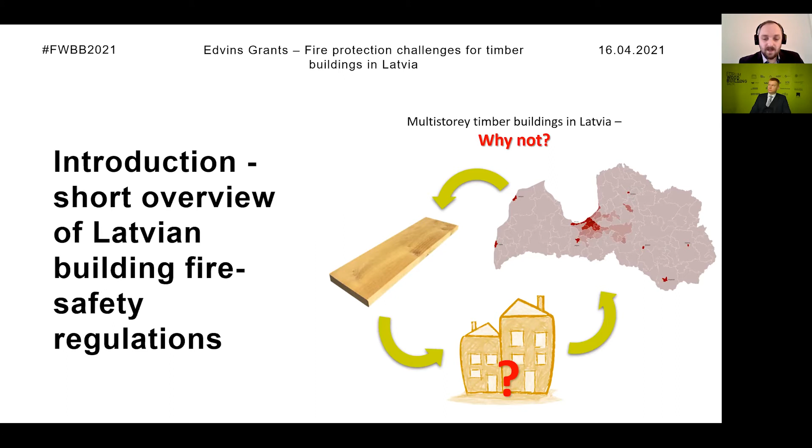First of all, I have to say for everyone who is not familiar with the Latvian fire regulation that this is a set of prescriptive rules. These are not performance-based. They are made with 2 main lines. One comes from the construction law. This is fire safety of the structures, and all the supplementary structural regulations which define the fire safety of the systems implemented inside the building, such as water supply, electricity, and so on.

And there is the second line, which comes parallel to this fire safety of structures: the fire safety regulation, which comes from the firefighting rules. This gives the regulation for the building during its time of use. And all this is supported by the Latvian standards. By Latvian standards, I mean all standards that are adopted or created and are current for the Republic of Latvia. These are Eurocodes, harmonized standards, all test methods, and so on. A lot of standards. So that is quite a difficult regulation.

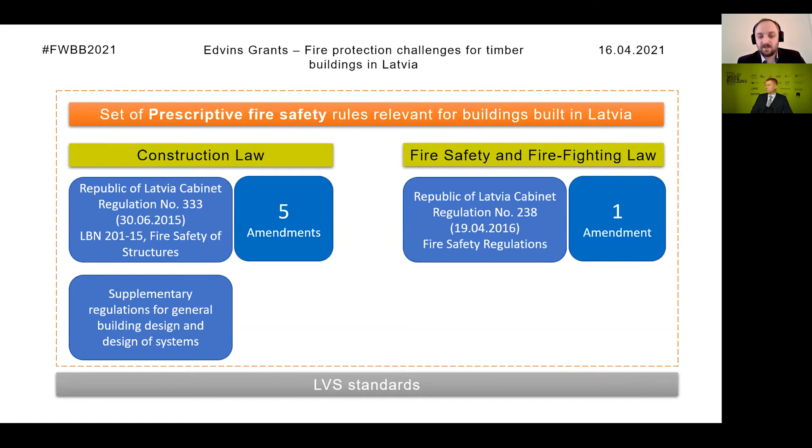In order to understand it, first of all, we have to look at how we are dividing all the buildings into use categories or use types. At the moment, we have 9 of them. This categorization is similar to what we have seen in regulations from other countries, but there are some differences. How does it work?

First of all, for all the building use types, we have 3 protection levels. The highest protection level is so-called U1, and it is subdivided into 2 groups, A and B. A is for the buildings which go high, the high-rise buildings, and class B is for wide buildings like storage areas, shopping malls, and so on. For U3, the lowest protection level category, there is no such subdivision.

Then, parallel to this protection level, we have the prescribed fire load density groups, which don't mean the same thing as the building use type, because there are building types where different buildings within the same use type have a different load density group. And there are also some algorithms to calculate the fire load density in a general way, which contradicts the Eurocode system, but that's a different story. And then we have the prescribed performance limits, which serve as a filter for all of these performance classes and protection levels.

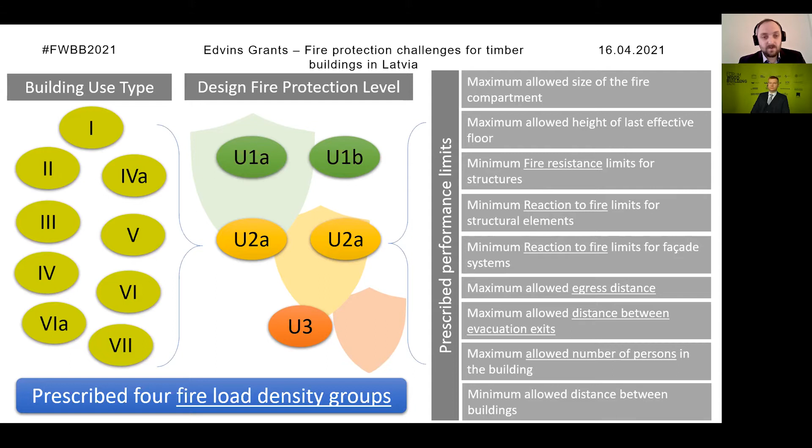To understand how it works and how it is aligning with the timber buildings, I have prepared one short example. For example, imagine if you want to create a 5-story residential building, and you have initially thought that it should be made of timber. So what do we know?

From the prescriptive rules, we have 3 levels of the fire protection design and fire protection level, and we normally would like to have the highest protection level because we want to save the people or the property inside the building. Our rule says that dwellings have fire load density which is below 300 megajoules per square meter, which contradicts with the informative Annex E from the Eurocode 1.

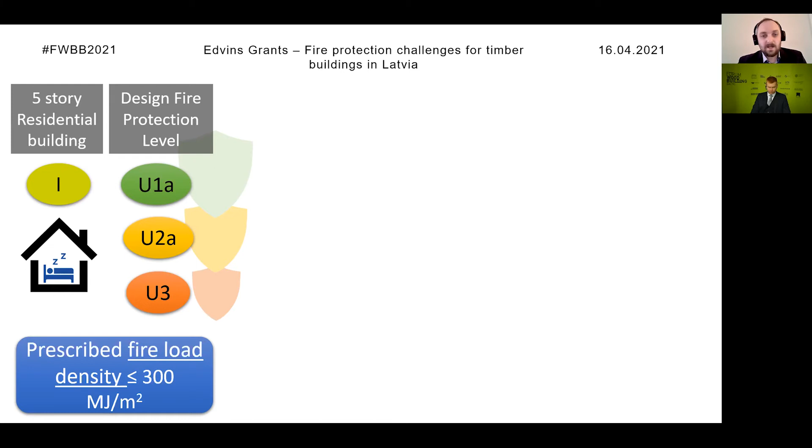This is interesting because it also contradicts with the Swedish fire load handbook and other informative materials that are around in the world. That is something that I suppose we will have to change in the future. And then we come to the performance filters.

First of all, we have defined the maximum allowed size of fire compartment. Fire compartment, the definition in Latvian regulation, differs slightly from the definition in the Eurocode, and therefore we have different attitude for this parameter.

Let's see. For example, if we want to build a highest protection level building, it will allow us the compartment size of 5,000 square meters, which is not exactly as it should be because the larger the area, the higher the risk of the fire occurrence. And this means that it is not like a restriction, but the opposite.

When we are talking about the fire resistant walls, the minimum fire resistance class allowed for the load bearing structures is 120 minutes. And then comes the tricky part. The regulation says that from the point of view of combustibility, the structural elements should be A1, which means that in the highest protection level, use of timber is completely restricted.

Distance to the egress exits is 30 meters. So it means the highest protection level, we won't achieve it with the simple means. Then comes the medium protection level. And as you can see, the allowed size of the fire compartment is twice smaller. So it is a little bit safer situation from the point of view of fire protection. But anyway, the combustibility limit creates an impossible barrier for the timber as such.

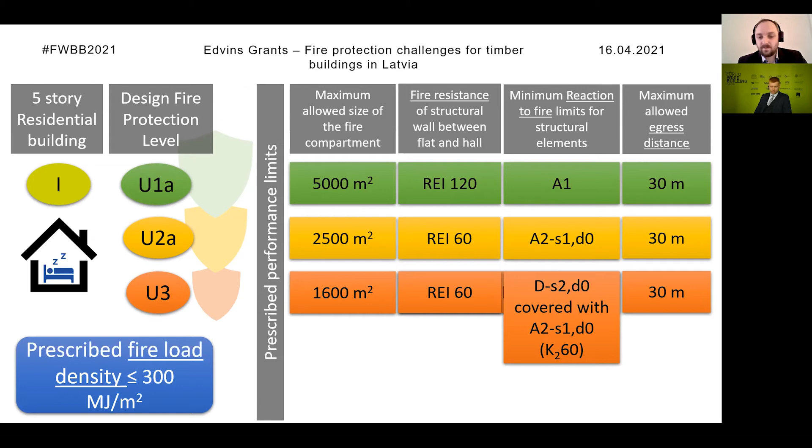So from this, I already can see that there are so many additional restrictions and things that show that someone is very afraid of the timber buildings from the point of view of the regulation. And if we compare these requirements, it seems that the lowest protection level for the timber buildings is larger than the medium fire protection level in a conventional way.

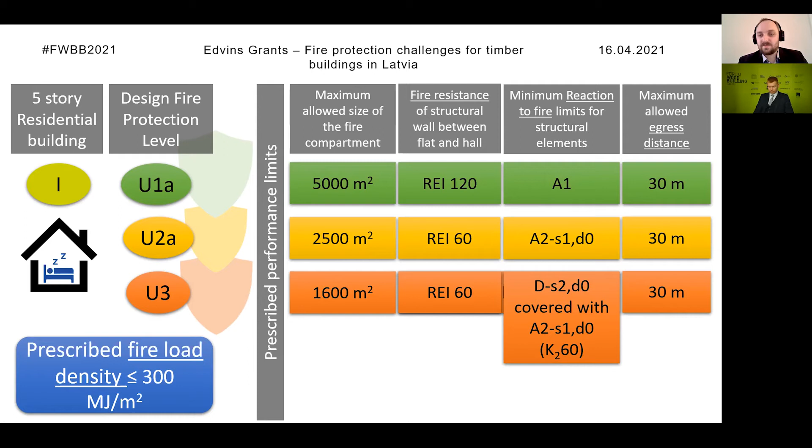So this is, I think, already an obvious reason why designers and architects don't want to handle timber. It adds a lot of additional work to the whole design process. So then I raised the question why we are so afraid of the timber buildings, and I got inspired from the research done in Switzerland, where the authors searched the answers inside the statistics created by insurance companies.

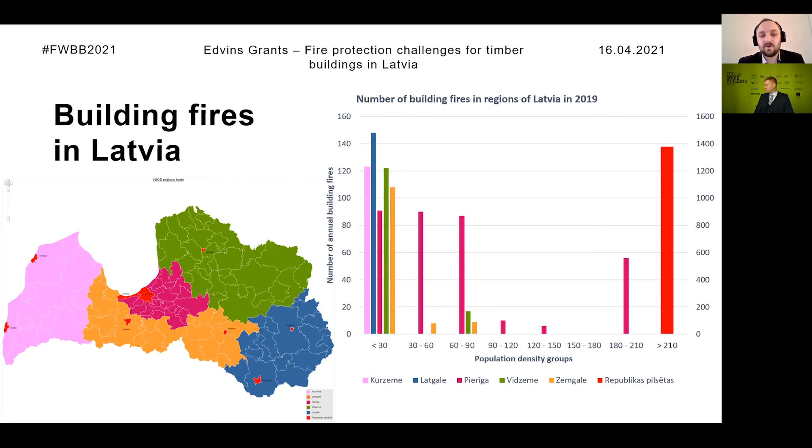For Latvia, I can't find such data because we do not have a mandatory property insurance as it is in Switzerland, but we have the statistics gathered by the National Fire Service. What we can see from these statistics is that logically most fires happen in the populated places like cities.

In 2019, there were 2,200 building fires, where 84% of all these fires were residential fires. So it means that the residential buildings were on fire. In 2019, the death rate was 4.5 persons per 100,000 inhabitants, which is basically the worst ratio in Europe, and it is one of the worst in the world. So the death rate is too high, I would say.

And when we look at the causes of those fires, for the residential buildings, in 32% of cases that was an unattended cooking device. So it means we are careless when we are cooking something. There were 20% of fires caused by careless smoking, and 17% of fires caused by irresponsible use of fire. So it looks like people are making those fires quite often, and this is quite a problem.

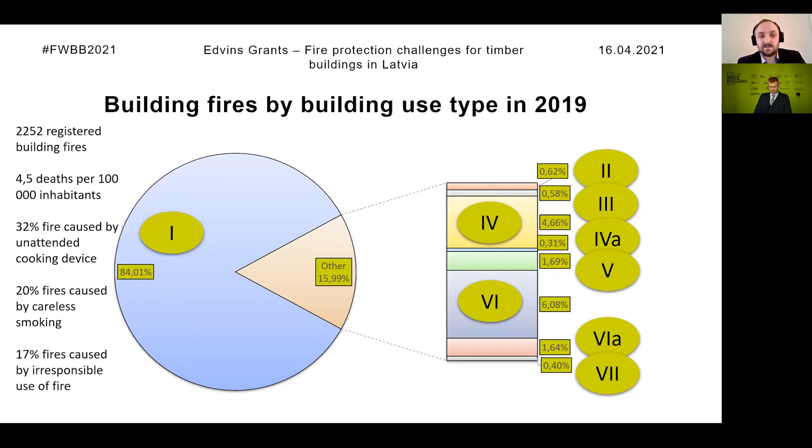Then, what are the typical traditional Latvian buildings? This is one of the buildings I have on my road home. Every day I see this building, and beside this building, some years ago there were 3 other similar buildings which have been burned down. As you can see, these are old buildings built between the world wars, and they are poorly maintained. So this is another reason why I think we are so afraid of timber buildings.

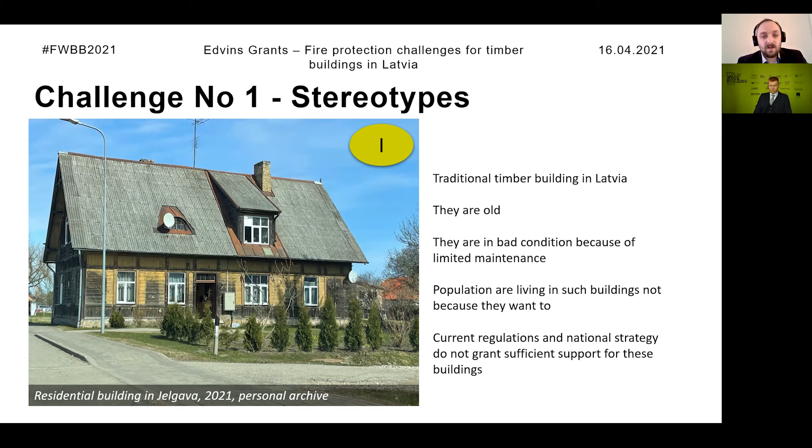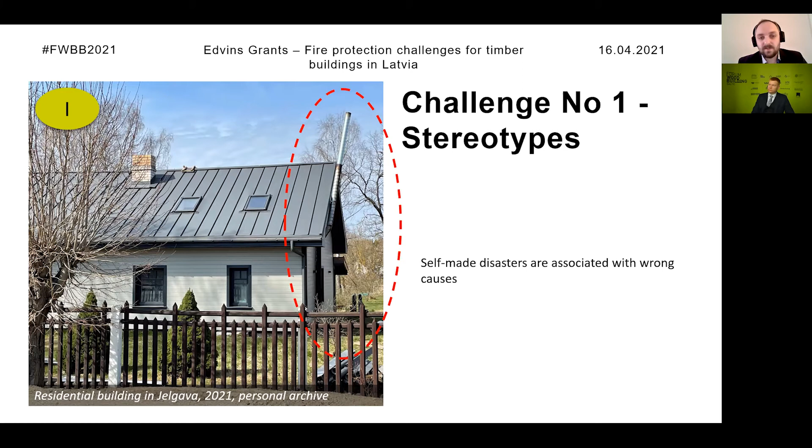So the first challenge for the fire protection and the architecture of timber buildings is those stereotypes, which are based on a good foundation. Another picture I found is also on the same road home. It is a newly made timber building, but what can we see here? It is some kind of additional chimney made of a single skin and attached directly to the timber cladding facade. So it is a self-made solution, which is actually a time bomb for this nice-looking building, built the way we have often seen in Nordic countries.

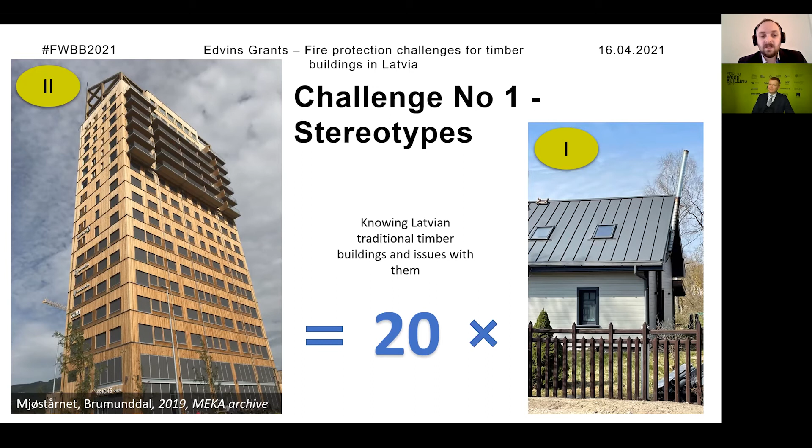So you can imagine that when we look at this Norwegian high-rise building made of timber, the Latvian National Fire Service will look at it as our national timber building multiplied 20 times, and that is causing the problem because we do not understand how to make our buildings safer. And for this, education and knowledge are the key factor. And as Andrea already showed, there must be understanding of the fire dynamics, heat release rates, and how fire works.

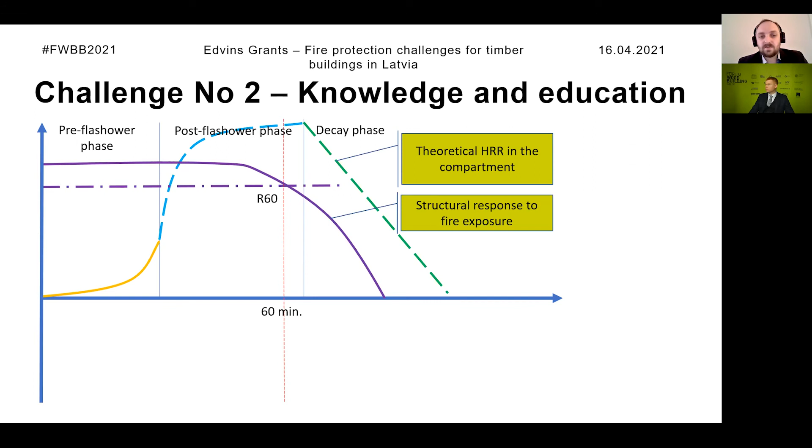This one is the parametric fire scheme, which is then compared with the structural response to the fire so that we can analyze whether the structure is good enough for the purpose or not. Then we analyze the evacuation process, where we have tools to theoretically make a model without additional testing. Of course, we can then calibrate these values with actual tests, because they must be calibrated. They are influenced by the mentality and other things.

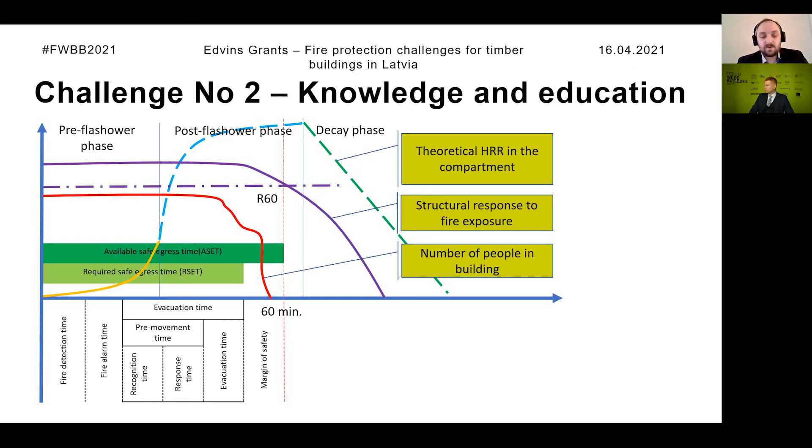But we want to have the safety margin in the structure. And we also want to check what the response of our fire service is. We want them to also be safe during the event of fire. When we have this knowledge, and everybody inside the industry has this basic knowledge about fire events in timber buildings and all other buildings, I think we will lose some of the borders we have now, some restrictions for timber.

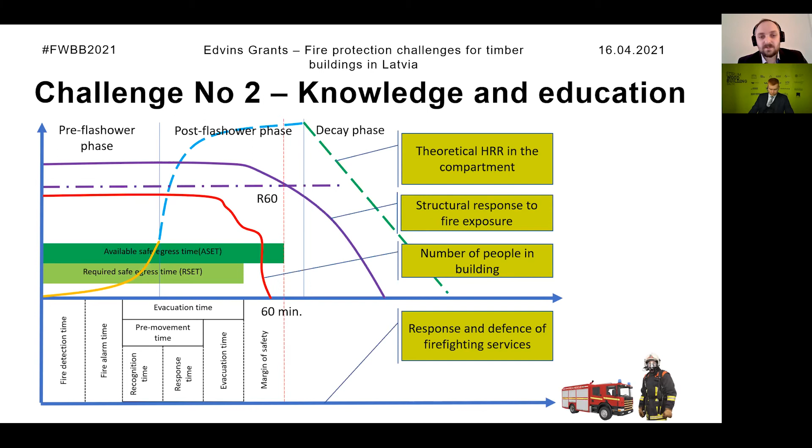How to do that? One thing I have found is that there is no problem with the firefighting service, because we know who is doing the firefighting and they have an option to get education. We have fire safety specialists who also have the ability to get education and knowledge. But there is an interesting thing with fire protection, because at the moment fire protection is handled by architects and structural engineers who have admitted that they have insufficient knowledge about fire engineering as such. So that is the main question: who has to be responsible for fire protection during the design process of the building?

And as I have seen from the other nations, there is always a so-called fire protection engineer. There is such a profession and there is such an education for these engineers who work in a team with the architect, the structural engineer, the builder, and everyone gets a clear picture of what fire event is expected inside the designed building. So it means that we are lacking one large piece in the chain who could provide the complete system for the design process of buildings.

When we add this link to the chain, we will have timber buildings, I'm sure of that. So the next challenge is to implement new knowledge in reality. And we got the opportunity to do some testing or exercising with the support of the Latvian wood construction cluster, the National Fire Service, and Salaspils municipality, together with the architect Miķels Putrams, who has already demonstrated this building under construction at the moment. It is the 7th preschool education facility, made completely of timber, and from the Latvian regulation point of view it was completely impossible to build or design such a building.

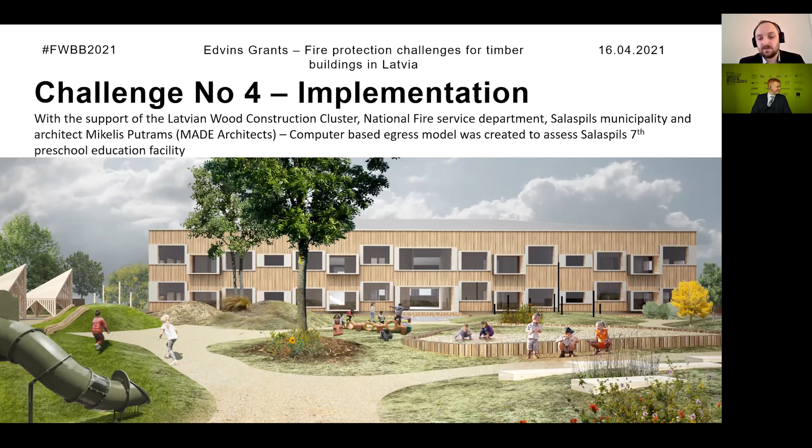But we created a theoretical fire event in this building using the principles I have shown before, with additional knowledge about the evacuation process, where great support came from the SFPE handbooks. There is a very nice collection of scientific papers which are very relevant for Latvian kindergartens, because the research represented in these handbooks was done in Russia. Russia shares with us some part of history. Our kindergartens are built very similar to those in Russia nowadays. They have the same seasonal issues. They have winter. Basically, that is very good data for us to make a theoretical model of fire events and egress scenarios for Latvians.

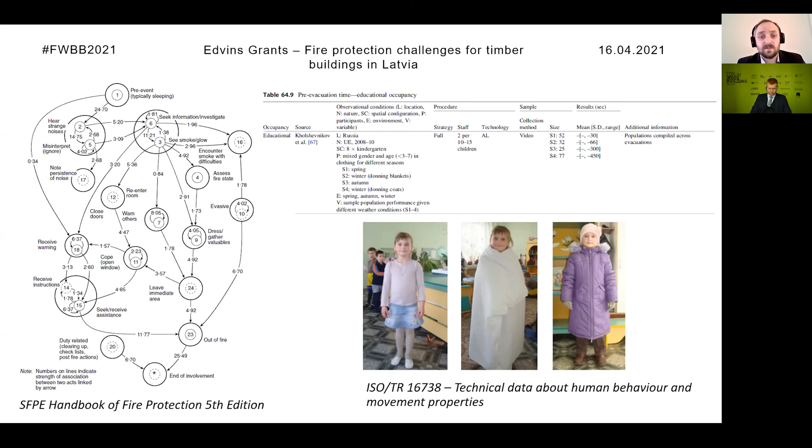So we used the data and created a very large and special occupant profile list. And for each of the occupants, we created scenario trees where we made action plans for them, which should afterwards be implemented in the fire safety plan of the building. Then we placed all these data inside computer models and made an actual computer simulation of all the processes happening inside the building, and it amended the initial design greatly for the architect.

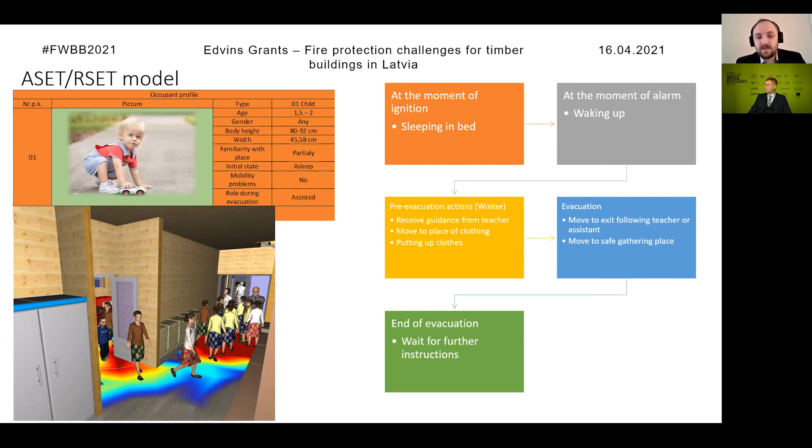It showed a lot of interesting things about how things might happen during the fire event, and it also helped the firefighting services to see that we are not trying to implement timber just because we want timber, but we are also thinking about safety. Okay, in this case the safety was a little bit over-designed, but anyway, this is one way we could represent the principles, the knowledge, the competency from other countries in the world, and then make a good solution for our own timber building.

An absolute necessity is quality management and a code of ethics for these engineers, to have some kind of reliability from the customers, and only then can we talk about how to change the regulation. First comes the knowledge. So at the end, I would like to say that there is nothing wrong with having so many challenges and problems, because as we know, we have come from a very bright past, and we are in the process of development, and this is just a normal process, and I think we will all reach the bright green future with timber buildings, and that is achievable for us.